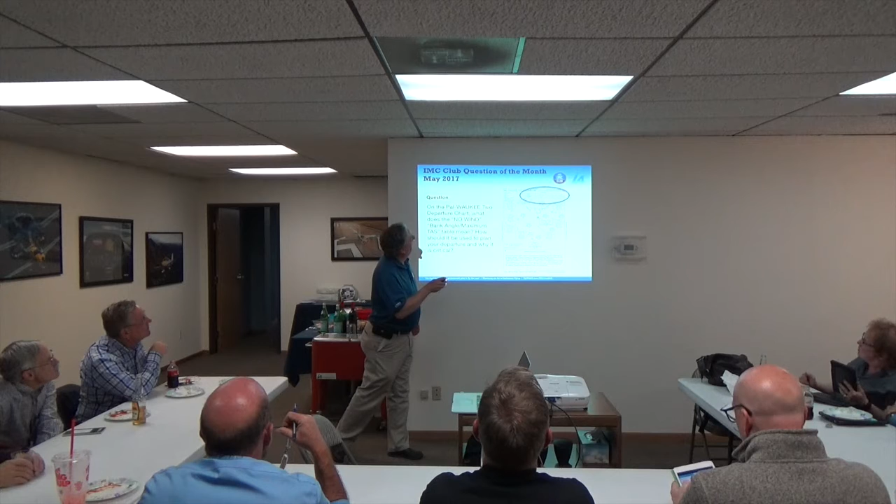So up here, no wind, bank angles, so you've got a bank angle and you've got a speed, a maximum ground speed. And if you look, they're depicting it here. That's turn radius. So I think there's a note, the turn radius of less than 5,000 feet is required. So they're saying at a 5-degree bank angle, you can be going 70 knots and make that. But if you're going 122, you better be in a 15-degree bank and no wind.

And is that for one runway only, or is it for runway 16? So keep it out of Class B airspace. Must be in the way? Yeah, if you look, O'Hare right here. Yeah, so here's the answer.

Your license is at stake. And what's interesting, that's a private tower, not a federal tower. Oh, is it? Or it was at the day. That's a good airport to do no SIDs or STARs when you're flying out of. It had to be JD said that. Expect a 5-hour delay, kind of interesting stuff. Glenview Naval Air Station was just north, and it's not in commission anymore, now O'Hare just south, so, cool houses. Okay, so pretty interesting.

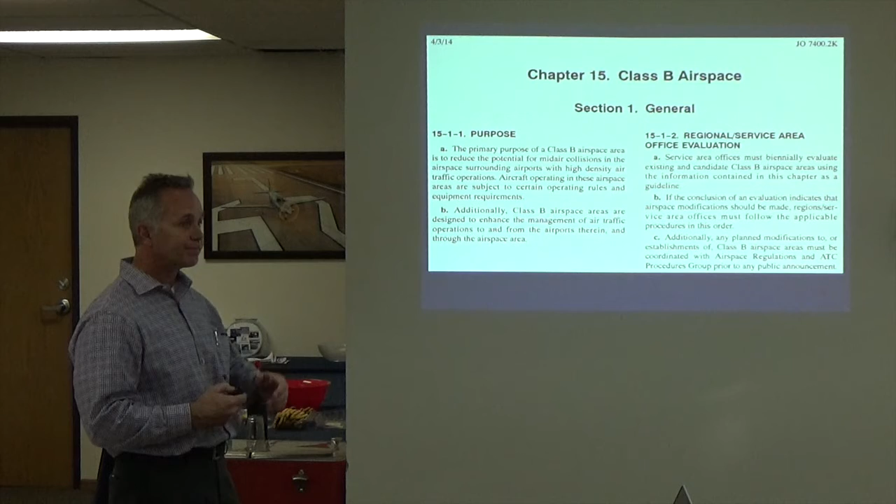Are you still on the radio, or do you just? I have to be on the radio 8 hours a month is all. Sometimes that's hard to get, but I only work it when it's not very busy now. I've been supervising for 10 years, so I let the younger generation do that. Does that mean you're there at like 3 in the morning then? No, see, I used to have to do that, but when you're a super, we don't do that anymore, nope.

So we've run, I don't know, 2,000 to 2,500 just to DIA, and then of course upwards of 4,000 in the whole TRACON area.

Denver Class B. Just a quick question on that. If you're coming in on the downwind like that, how many times do you have to speak to each plane?

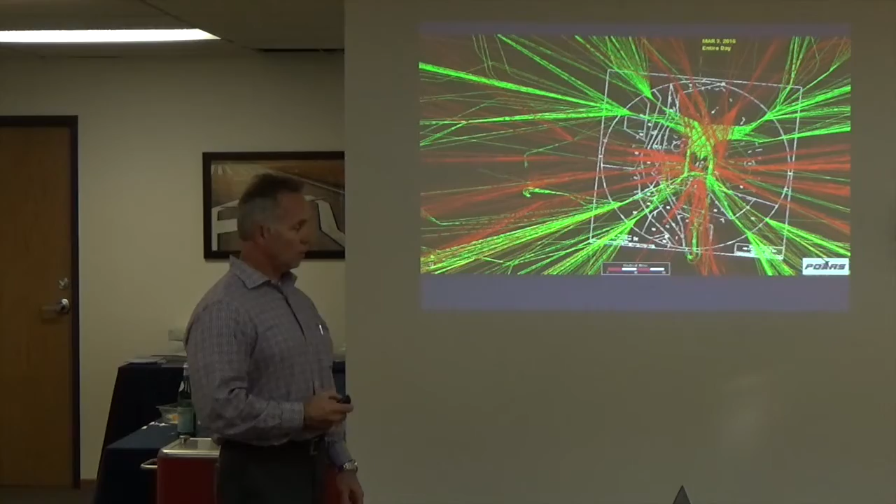Well, we used to have to talk a lot. I don't know how much of you guys know this. This is Powder and this is Larks, and these are arrivals. They used to just be an arrival to the VORs, they go to Mile High and Falcon. Now they put in the RNAV arrivals, so now all the step downs, turns, and speeds are done by the pilot instead of us. So you just say descend.

They come in and say we're descending via, and we say roger, expect runway 16 right. And so they're shipped around to the final approach controller, and he vectors everybody so they can get in line.

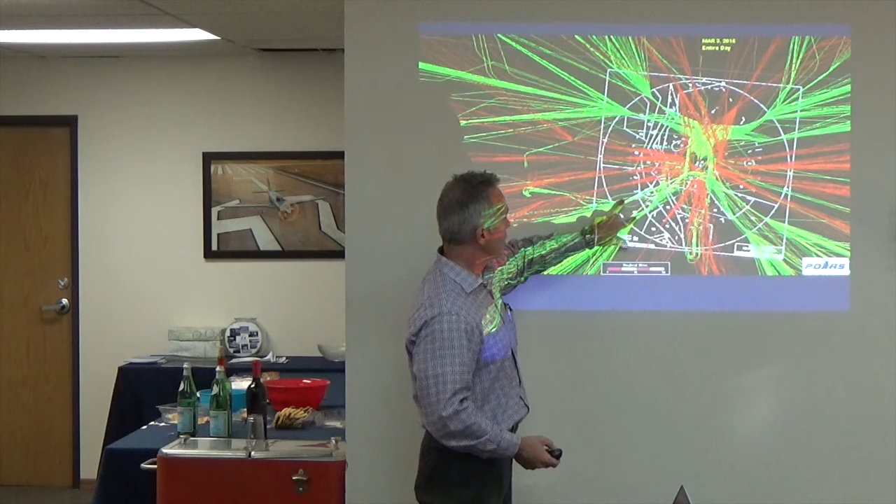But the only thing is, if you get two of them side by side, you're gonna pick one up to 280, and you'll have to slow the other to 230 and let it pull apart like this. Then you get a match, and they'll fall right in the downwind together. That's about the only thing we have to do anymore.

Or if it's an airplane not on an RNAV, some of them still come in on what we call the legacy, going to the VOR. We have to descend them, vector them, slow them, all that stuff. So this RNAV has made our job, well, the frequency congestion, a lot less.

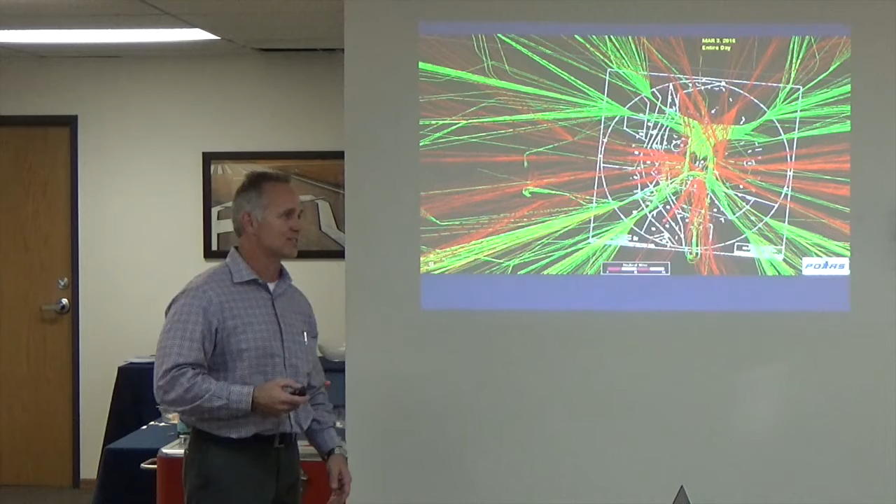So controllers at first said, no way I can vector better than this, this is not going to work. And now they all love it. It saves us a lot. But anyway, let's see.

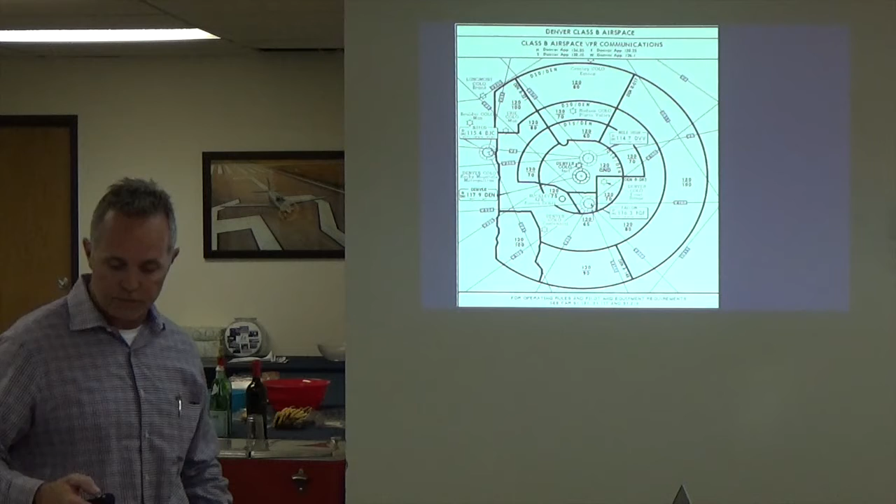So Class B, I'm going to jump over here. I hope I don't block anybody's view, but I'm having a hard time seeing this. Why don't you sit in? All right, I'll do that. Have a seat. I got a question.

So let's say you're up here at Boulder, and you take off, and you call approach and say, hey, I want some VFR flight following and traffic advisories, and I'm going down to Meadow Lake. Okay, squawk such and such, radar contact, Denver altimeter such and such. Here you go, and you're at 7,500 feet. You go across both those airports at 7,500.

Who says you have to get a clearance from Jeffco Tower and Centennial Tower to do that? And who says you do not? I say you do, to transition at 7,500, since it penetrates both Class Delta airspaces.

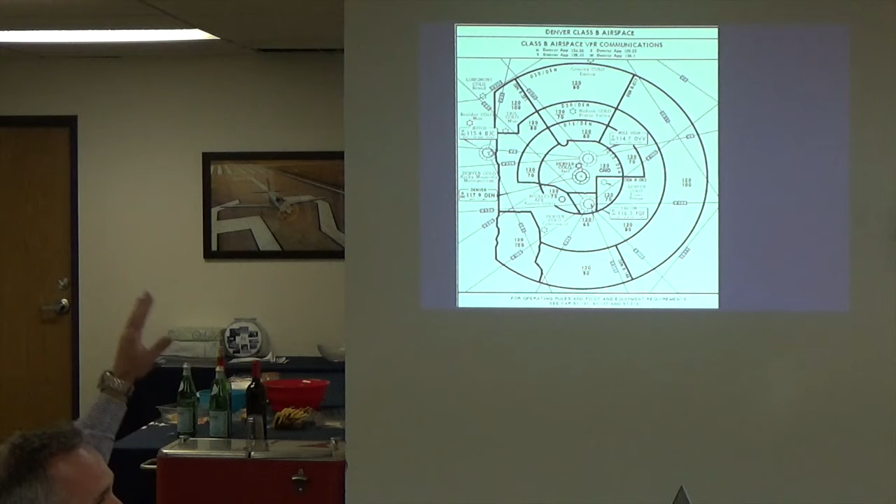Yeah, I'd say you do. Isn't the TRACON managing that? All right, show of hands, what do we got? Who says no? Who says yes, you gotta call both towers?

Our book says when you depart and we radar identify you, you as the pilot are not expected to call each controlling agency you transition through. So you do not have to call them. Now, if you're at 1,200 squawk, you do, if you're on your own and not getting radar advisories, then that's true.

So, it's kind of, I mean, even me as a pilot, I'm like, ooh. Yeah, but we transition a lot of guys across Buckley.

Is that because you're talking to those towers? We call and say, tower, point out such and such, we'd like to go through at 7,500. They'll either say point out approved, or say unable. So, all right, fly heading such and such for traffic, we turn you. So it is our job to call those towers and point you guys out.

You're not required to call them. It makes sense, think of just a Class C airspace that might only have one airport. You'd talk to one approach and departure maybe, and they'd clear you through, you wouldn't have to talk to the tower.

Jeff, you guys call, for instance, Centennial Tower if I'm coming in from the southeast with radar. Would you call Centennial Tower for me and tell them I'm coming? No, you're displayed on their scope if you're tagged up and we're working you, if you're on a discrete code.

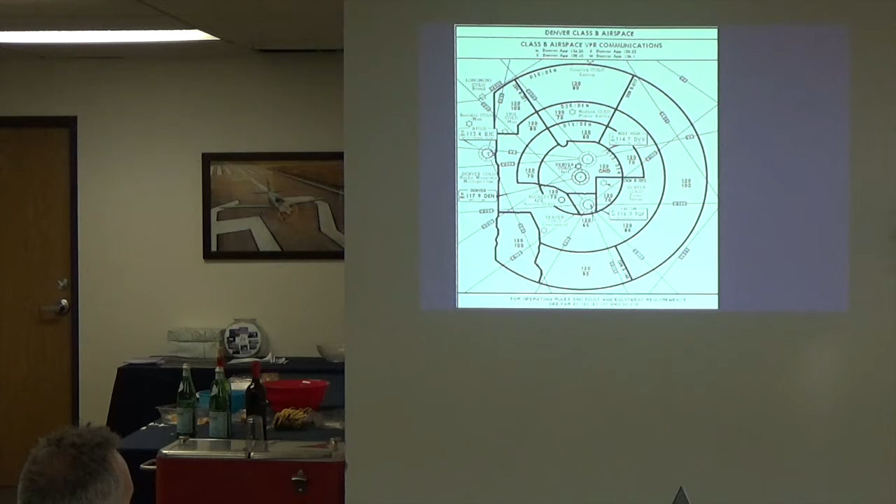So I wanted to go over that, just so you know. That's interesting. So that's flight following and a squawk code. Be more specific on your question. No, I'm just asking because sometimes under flight following, I've had them forget to tell me things.

That can happen, yes. Most of the people now at the TRACON have learned, because they've gotten in trouble letting a guy go and then Jeffco calls and goes, what's this guy doing? And then you get into one of those situations. So most of us are going to say, radar contact, proceed as requested, remain outside the Class Delta, Metro and Centennial, and now you're forced to navigate around it. Right, because I've heard you tell people to stay outside.

You want to make sure you put that on your NASA form, Karen. That's just easier for us, and you probably don't want to go through the traffic pattern anyway, so. Hey, safer for everybody.

You can tell them unable too, because of demand. Yeah, that's not unusual. We would call the tower and they would tell us unable usually, or Jeffco is just a lot slower. They've never disapproved it that I know of. We go to Boulder a lot from the south, and people wanted to send. So we call them up all the time and go through there. They don't have an issue.

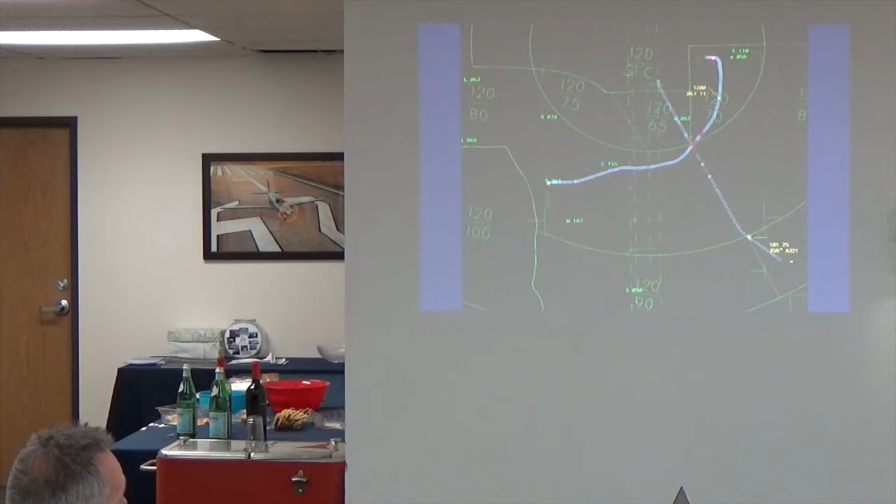Once that happens — here's Front Range, and everybody likes to fly out of Front Range — here comes a guy, he's at 67 on a 1200 code, doing 110 knots. So now, here's the next slide, and our conflict alert goes off. We call that the conflict alert. When you get that, it goes beep, beep, beep, beep — it's to get our attention.

Our controller saw this, and he tells this guy, traffic 1 o'clock, 5 miles, southbound, altitude indicates 6,700. Here's his mode C, at 75 — here's the mode, that's where he should be — 500 below.

He's already 500 below the Bravo and descending. Okay, still at 250. Yeah, when we clear them, they love to go fast and just throw everything out at the last second. Isn't the speed limit 200 under the Bravo? Under, well that's ground speed. We don't know what their airspeed is. But you're right, under is 200. He's not supposed to be under. No, he's not.

He was cleared for the visual, and the requirement, which I'll get to in a minute, is once you're cleared, it's your responsibility to stay in the Bravo as the pilot. Large turbine-powered airplanes, between 41,000 pounds and less than 300,000. That's kind of the opposite problem we have. We have to stay out of the Bravo. They're supposed to stay in the Bravo.

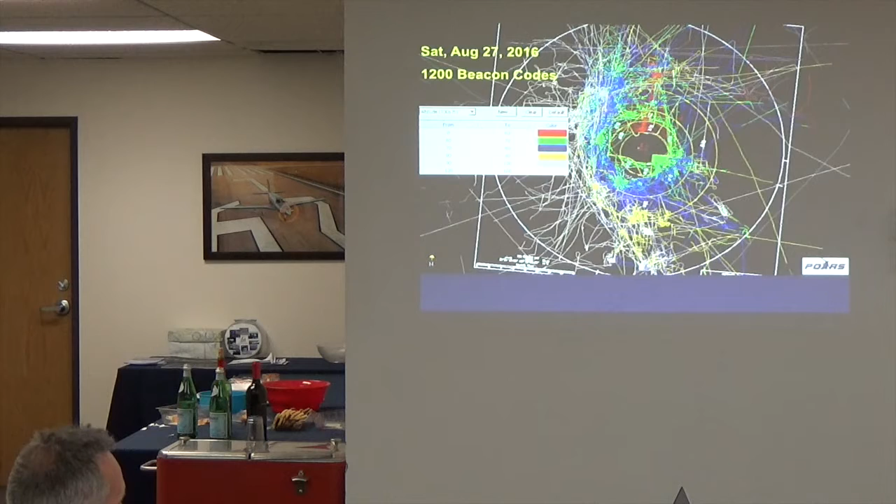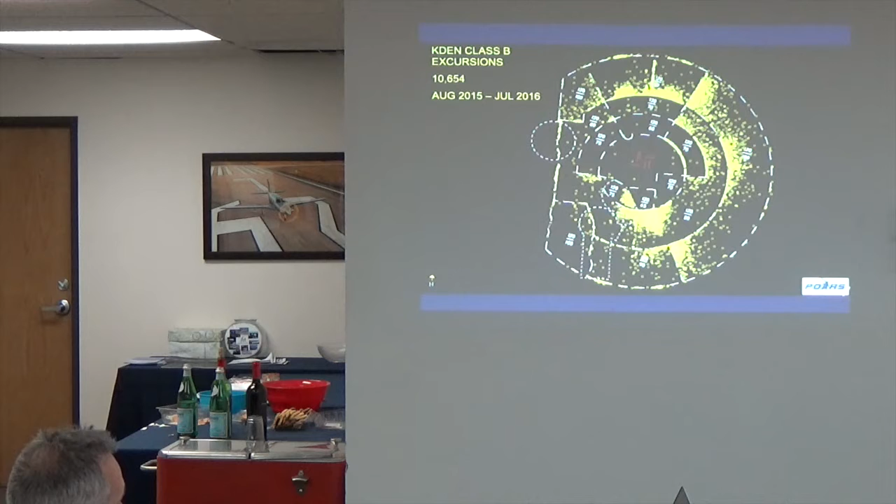Jeff, can you go back to the previous slide from this one - one more, where you got all the things showing there. Okay, so would it make sense if we took off out of Centennial and went a little bit southeast to stay away from where all the yellow blobs are, go right out to the right, and then cut up to Front Range, just from a safety standpoint?

What I was gonna suggest is usually what I'll do - I'll go at 75, give myself 500 feet instead of 100 feet. That wouldn't help with that 121 coming in there though - no, it's not gonna help with anybody violating the Bravo, the airliner's just coming out of it. It just looks like there's less of a threat the further south you stay. If you went like this, yeah, you're correct, probably be less of a threat.

I'm not gonna say it happens - I would say it happens now 4 or 5 times a day. It used to happen 25 times a day. It's a lot, and this particular incident really got us going to talk to the airlines. It's like, what happens if this was a midair with a big plane? Who's in trouble - you guys, the airline, everybody? Everybody's gonna have something to fight in that, I think.

The poor 1,200 code, he was minding his own business at 6,700 right outside the Bravo. He climbs into it just a little bit, obviously to miss that airplane, because we told this guy 1 o'clock altitude indicates 6,700. It keeps going down, and my thinking is I'm gonna stop descending. He's down there, I'm up here. But he went down to 7 for whatever reason.

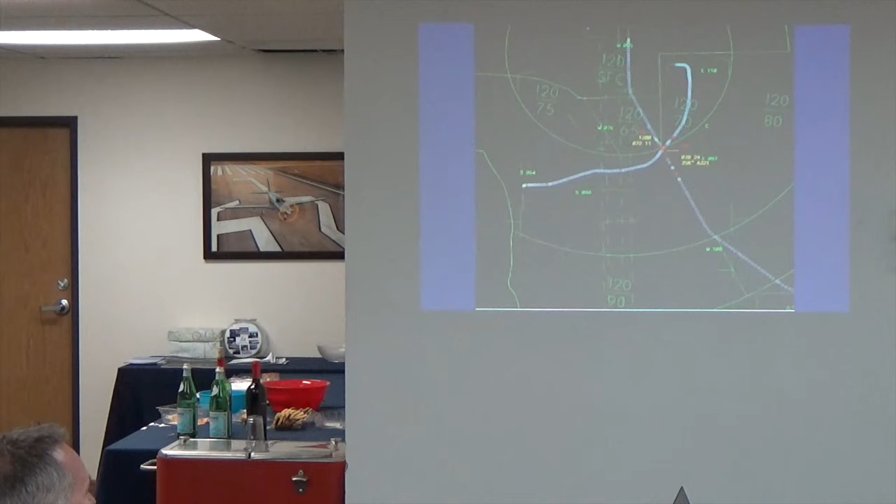Oh my gosh. You know what's interesting for the airliners is that the FMS suite, 530 or whatever you guys have in all these airplanes, you can depict the Class B on your nav display. Yeah, the airliners can't. You gotta go to your paper EFB chart or a paper chart to reference that. So the airliners are not up to date with general aviation. Equivalent of a G1000? No, hell no. We got a 430 with a pretty screen.

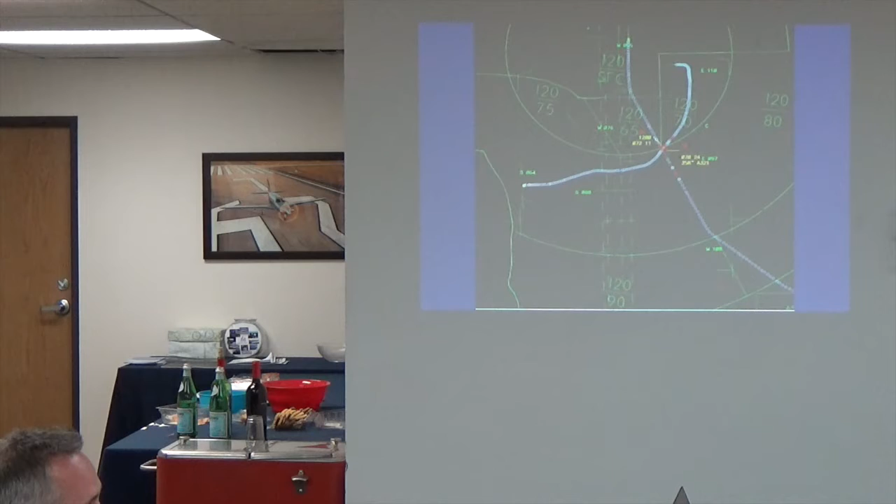But even a 430 would show you the segments of the class. You have to ask it what segment you're in, but we don't. The MD-11 has a great suite in it, but you have to go to the EFB to find that, or a paper chart before we had EFBs.

Well, we try to tell the guys when they come in, for example, they're coming in there, they're gonna have the localizer tuned up. They always do, even on a visual. Just stay on or above the glide slope and you'll be fine. You don't always need to look at a paper chart. That's a great rule, it keeps you from landing at the wrong airport, which a lot of guys have done.

That never happens. Pardon? That never happens. Oh no, not at all. Go ahead, sir.

This new Metroplex being proposed, northeast arrival coming in near the Bronco, they get you down to 9,000 feet across the northwest corner of the Class B, and you're outside of it. So basically you're gonna be violating this rule, right? No, because you're not gonna be on the Bronco landing at DIA. You're gonna be landing at a satellite airport if you're on the Bronco or the Pinner when they get developed.

Yeah, no, gotta still be primaries, DIA. That's a big argument for it. Well, and you're not gonna be in there as low as you think you are. You might get pushed down sometimes, but those are gonna start at 14,000 feet hitting our airspace.

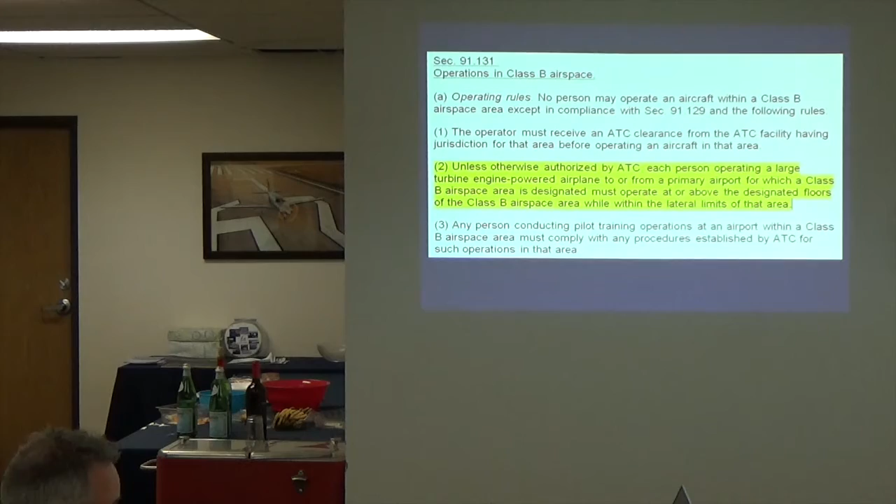Well, every time you talk, the radio, the music goes down - that was a problem.

I take it, if somebody's crossing over your airspace, you would prefer to talk to them. Yeah, we would prefer that, but it's not that big of a problem. I mean, if they're in the middle, they cut across an arrival gate and they're all descending from the flight levels down to 13 by the time they get close to the airport, and you come across at 15.5, I'm gonna stop the guys at 17 till I get across the route. I'm gonna give them plenty of buffer. I'm not gonna stop them for 500 feet. They could climb for all I know, or turn - I don't know what it's gonna do. So I give 1,500 feet for traffic, and then I'll say, now descend or whatever.

It's just easier, but it's nicer if we call and say, hey, you guys okay if we transition? Or you could even call, and if we say we need you to turn heading 180 for traffic, you go, I'm not doing it. Okay, then we have to deal with that.